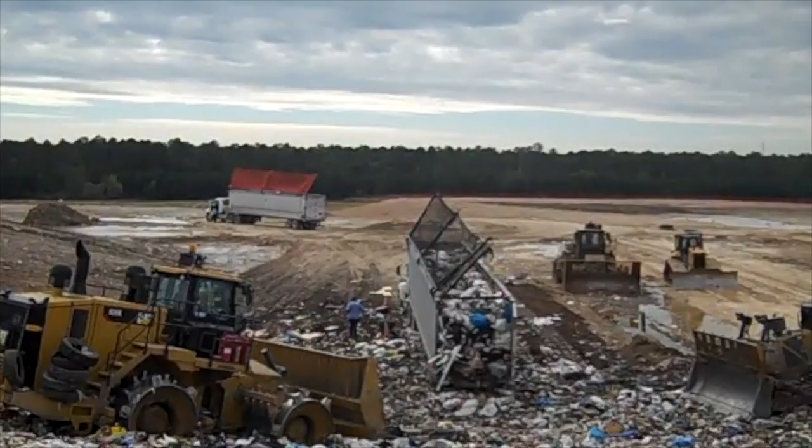A landfill is a place to dispose of waste material by burying it and covering it over with soil, especially as a method of filling in or extending usable land. Landfills typically consist of food waste, plastics, consumer goods, and packaging.

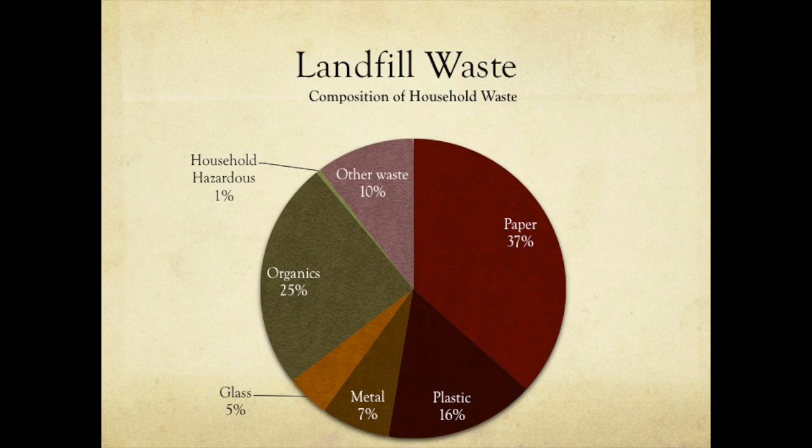Even though these items should be disposed of elsewhere, it is inevitable that electronics, appliances, yard waste, and even hazardous waste enter these municipal waste streams. These wastes emit pollutants, which require air pollution control.

Landfills are classified according to amount and types of waste received. Today, Florida has approximately 95 active Class 1, 2, and 3 landfills. Class 1 landfills receive an average of 20 tons or more of solid waste per day, and Class 2 landfills receive an average of less than 20 tons of solid waste per day. Class 1 and 2 landfills receive general, non-hazardous household, commercial, industrial, and agricultural waste.

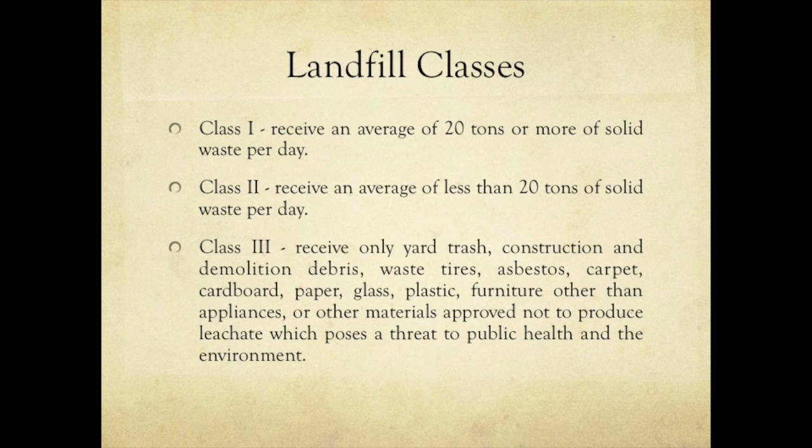Class 3 landfills are those which receive only yard trash, construction and demolition debris, waste tires, asbestos, carpet, cardboard, paper, glass, plastic, furniture other than appliances, or other materials approved not to produce leachate which poses a threat to public health and the environment. The municipal waste industry contributes to global contributions of greenhouse gases, as well as air pollutants that can cause direct harm to human health.

A primary concern that must be addressed in the design and operation of modern sanitary landfills is the potential explosive nature of gases that are produced by decomposing solid waste during the landfill's life. Landfill gas is a product of solid waste decomposition by anaerobic digestion, composed primarily of methane and carbon dioxide, both of which are greenhouse gases.

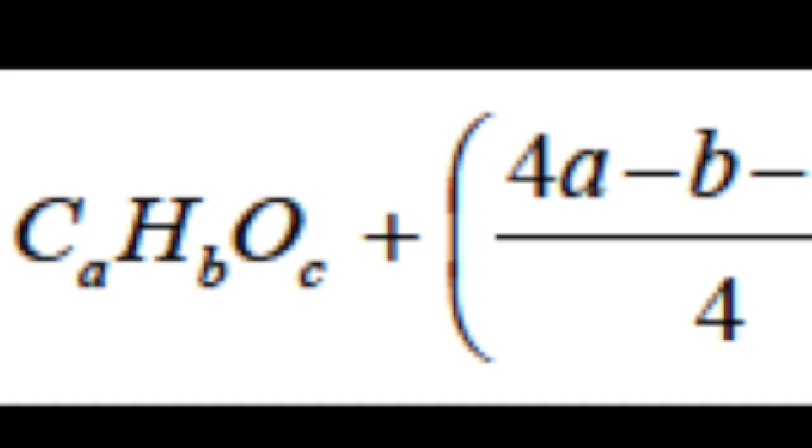It also contains oxygen, water vapor, and minute concentrations of trace gases such as nitrous oxide, hydrogen sulfide, carbon monoxide, VOCs, and non-methane organic compounds. The chemical formula for the anaerobic biological conversion of organic solid waste to methane and carbon dioxide may be described as the decomposition of cellulose, resulting in a final composition of 50% methane and 50% carbon dioxide by volume.

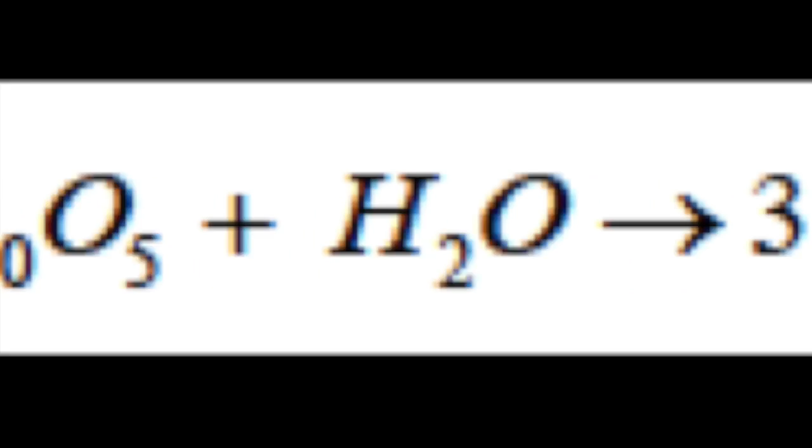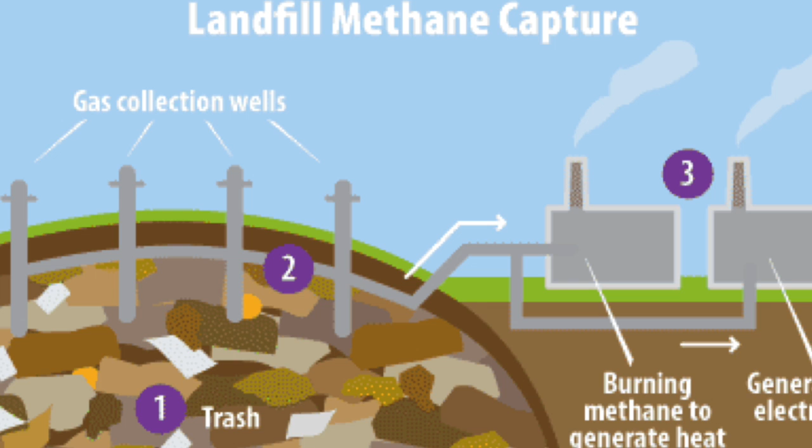Methane is not harmful to human health, but when mixed with the appropriate amount of oxygen, it is flammable and can potentially be explosive, a characteristic many landfills take advantage of by converting landfill gas to energy.

Human lungs transform oxygen into carbon dioxide, which is exhaled and uptaken by plants. Hydrogen sulfide at high concentrations may produce multiple health effects such as irritation to the eyes, throat, and lungs.

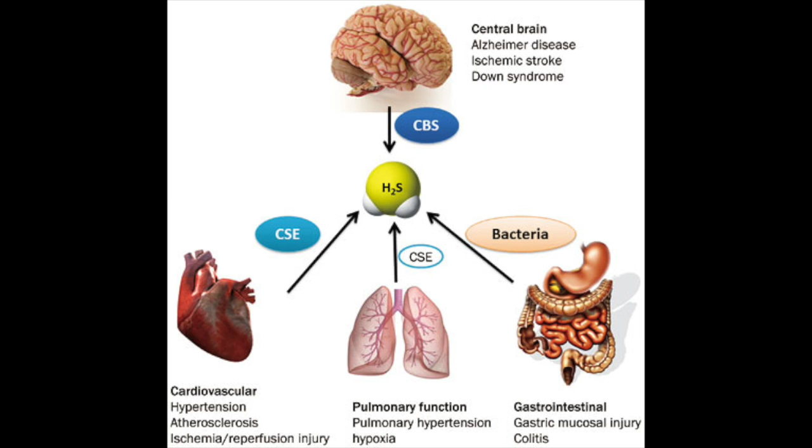Collecting landfill gas can improve air quality by reducing odors and emissions of pollutants such as non-methane organic carbons that can contribute to smog formation.

Our task was to assess the major air pollution problems generated from landfill gas, focusing on the means to mitigate their contributions toward global greenhouse gases, effects to human health, effects of non-renewable resources and energy costs, associated regulation, and landfill air pollution control methods of the best available and most effective technologies.

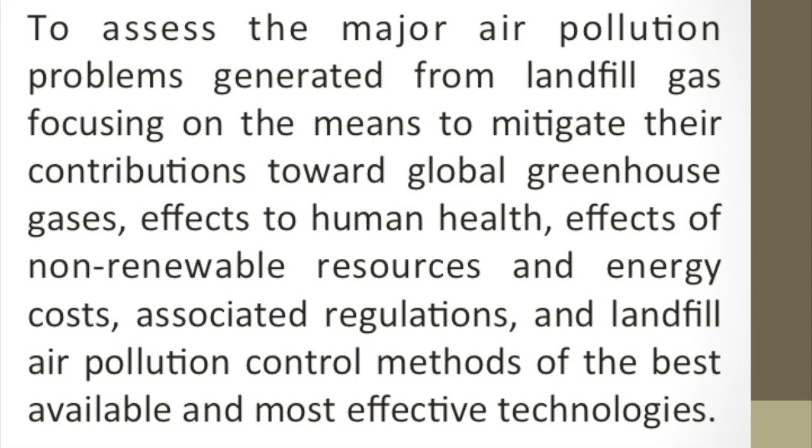Landfills and landfill gas energy projects can be subject to air quality, solid waste, and water quality regulations and permitting requirements. State and local governments typically develop their own regulations for carrying out the federal mandates. Therefore, specific requirements for construction and operating permits differ among states. It's important for project developers to review applicable requirements and regulations.

The Clean Air Act, CAA, regulates emissions of pollutants to protect the environment and public health. The CAA contains 5 provisions that may affect landfill gas energy projects: 1. New source performance standards and emission guidelines. 2. National emission standards for hazardous air pollutants, NESHAP.

3. New source review permitting. 4. Title 5 permitting. And 5. Information Collection Authority, which was used to implement the Greenhouse Gas Reporting Program.

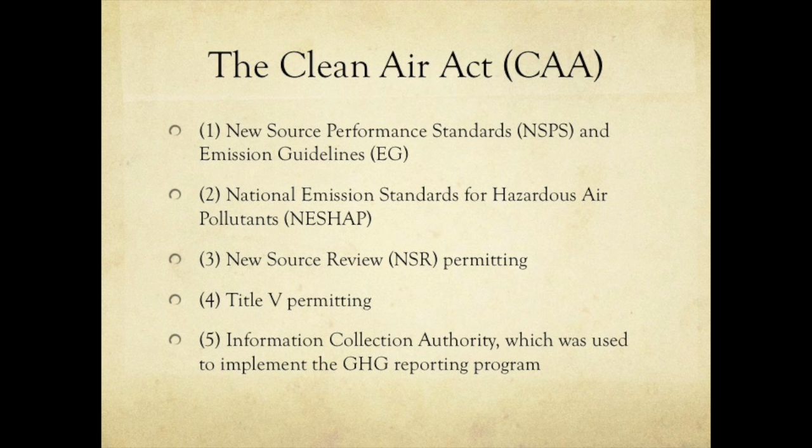Landfill gas energy projects can be part of a compliance strategy to meet EPA's landfill NSPS. Under this rule, landfills meeting certain design capacity, age, and emissions criteria are required to collect landfill gas and to either flare it or use it for energy.

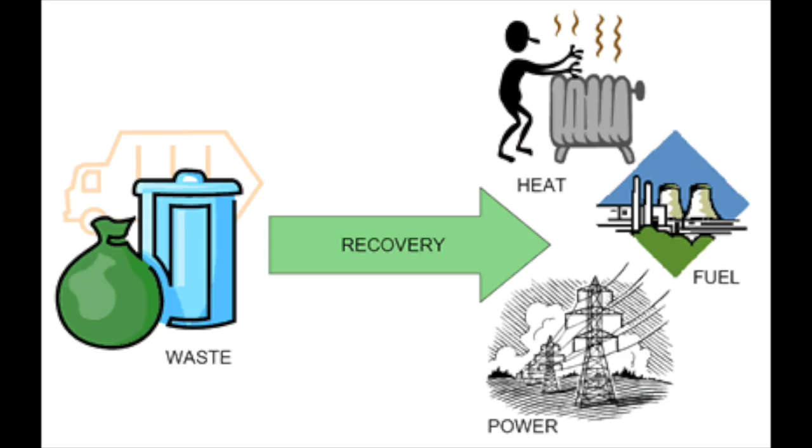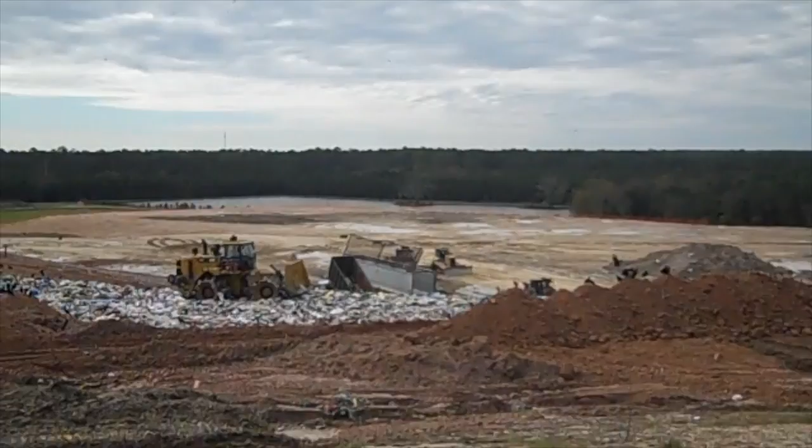The New River facility is a Subtitle D bioreactor landfill with Title V permitting. New River Regional Landfill collects waste from a 6-county region, including Alachua County, resulting in a combined 800 tons of waste per day, peak 1,200 tons per day on special days.

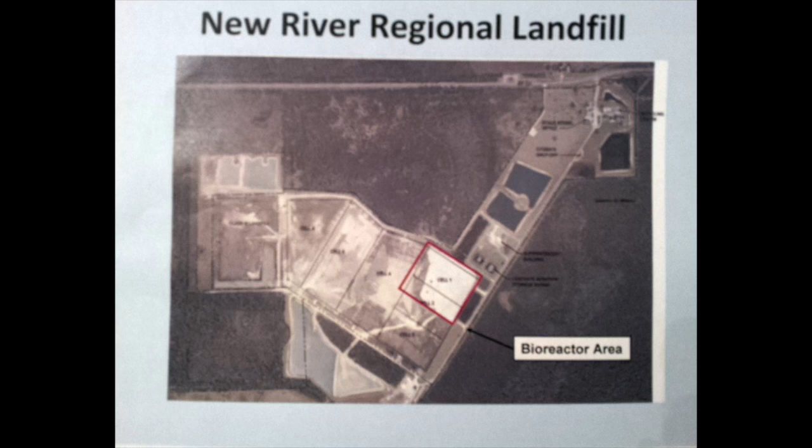Opened July 1st of 1992, the 200-acre facility is divided into 6 cells. Each undergoes an anaerobic digestion cycle to collect the waste emissions.

Over time, these emissions are pumped, collected, and analyzed by on-site instrumentation for relative composition.

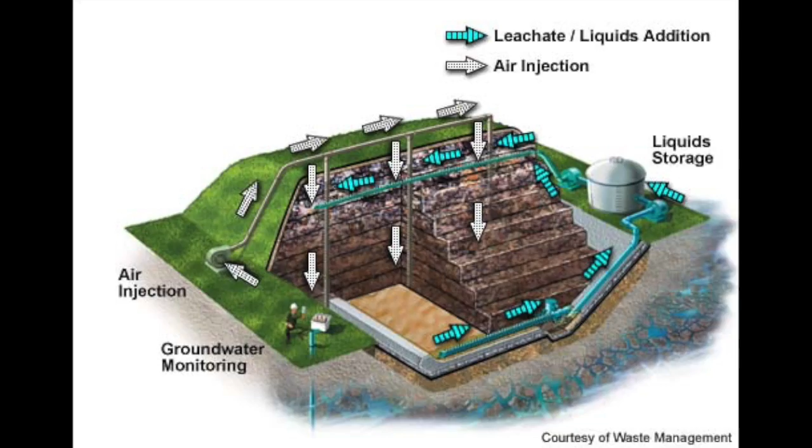A bioreactor landfill operates to rapidly transform and degrade municipal waste. The increase in waste degradation and stabilization is accomplished through the addition of liquid and air to enhance microbial processes. By efficiently designing and operating a landfill, the life of a landfill could be extended by as much as 20 years.

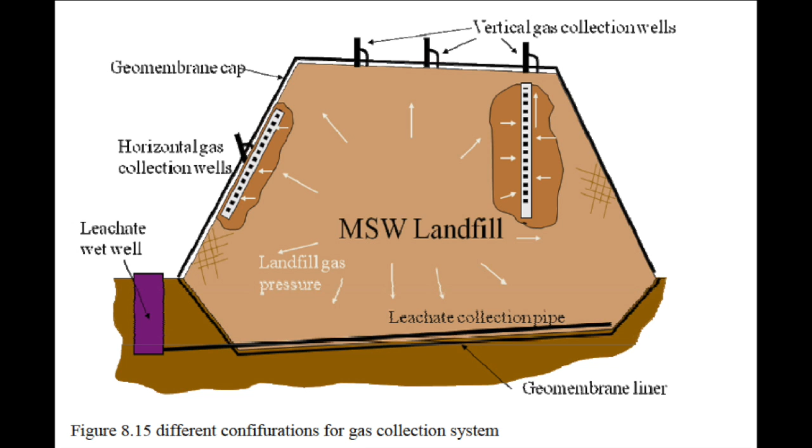Different techniques may be used to collect landfill gas. Possible options include use of horizontal collection systems, vertical wells, or surface trenches under the caps. Let me explain: vertical wells are drilled either in clusters or as individual units.

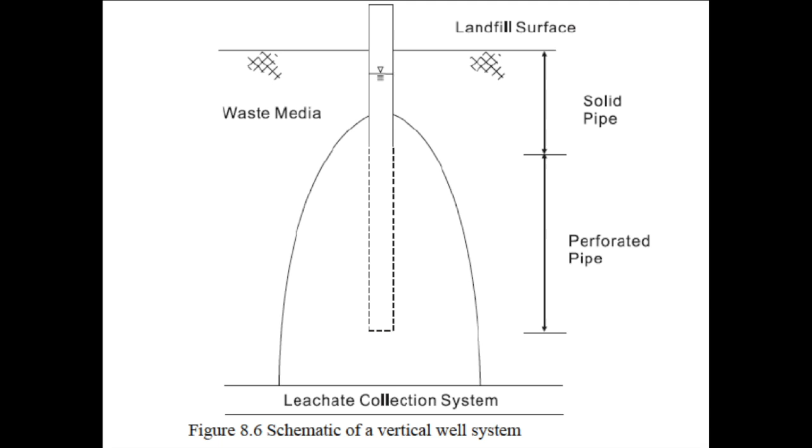Well spacing is variable and is generally recommended based on an evaluation of the radius of well influence. The clustered wells are completed at varying depths to get top to bottom extraction. Horizontal trenches or vertical wells are connected by a manifold to a mechanical blower.

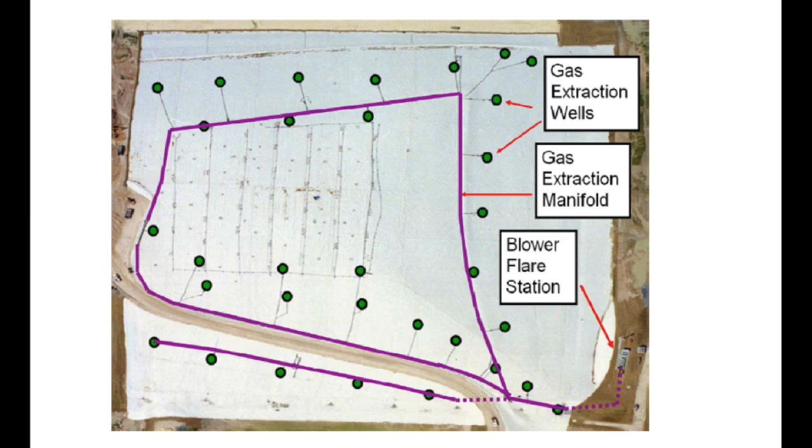The blower induces a vacuum in the manifold and in the wells or trenches, extracting gas from the landfill interior. All the while, the vacuum has to be maintained so as to not draw air into the landfill. So the two blowers that are operating are what is powering the vacuum system across the whole landfill.

So what we have are two blowers, or two vacuum systems, working in tandem, and then you have a backup. You always build a backup when you're balancing your well field, which is what we do on a pretty continuous basis out here.

And so the harder you pull, the more chance you have of pulling in air, so you're introducing oxygen into your landfill, which is something that you don't want to do.

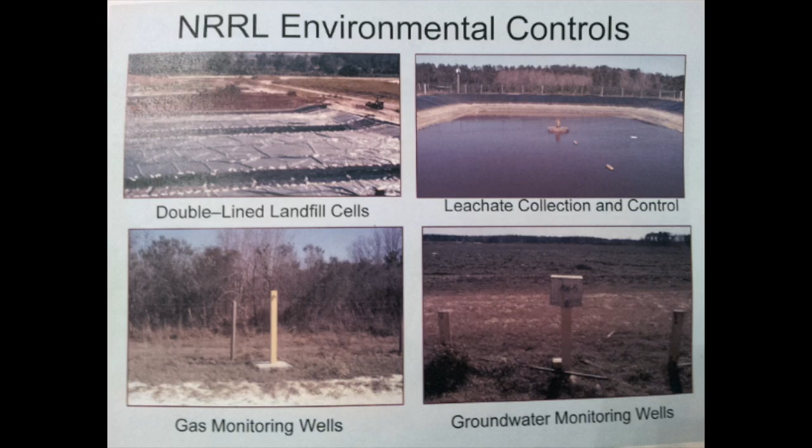Maintenance of the gas collection system is critical to capture quality gas in great quantity. Gas quality is an important measure of a fuel's performance and safety. Trace gas components are an important factor as well due to regulation.

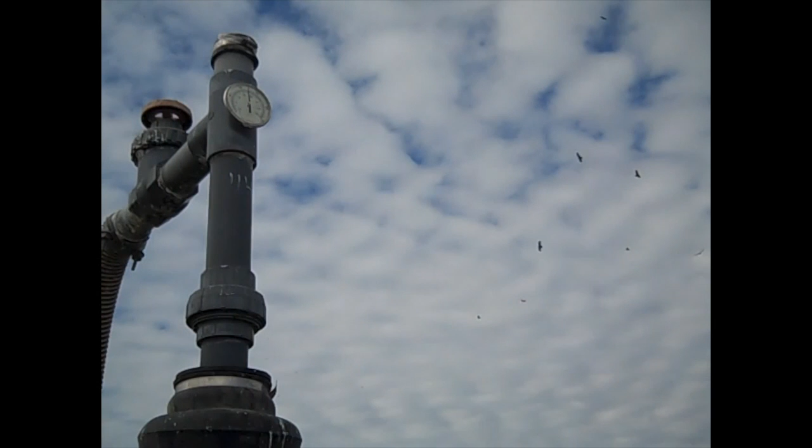For landfill gas emissions, peak concentration for stored waste climaxes at around 5 to 7 years. As a result, most air pollution control methods for Class 1 landfills are more subtle by nature and consequently not as intensive as other air pollution technologies found in other industrial services.

There are many different trace gases present in landfill gas, but they're at such small quantities that we typically don't deal with them on a daily basis. That's something you check on an annual basis, or maybe semi-annual.

Typically, on a daily basis when we're balancing our well fields, we're dealing with methane, carbon dioxide, oxygen, and then a balance, which would be both your water vapor and your nitrogen. So when we look at all these wells, we're looking at methane, carbon dioxide, and oxygen.

Landfills affected by RCRA Subtitle D are required to control gas by establishing a program to periodically check for methane emissions and prevent off-site migration.

We have 27 groundwater monitoring wells and 28 gas monitoring wells to make sure methane isn't moving off-site.

Currently, the gas is burned into the atmosphere by this flare tower. The barely visible flame is indicative of how fuel-lean the emissions are.

The flare has 3 blowers, and we use 2 at any given time. We're able to set the flow rate of the vacuum system either by flow rate or by pressure. Typically, the flare operates at about anywhere from 1500 to 1600 SCFM, standard cubic feet per minute.

So that's what it's pulling out of the landfill at any given moment in time. But we can go up to about 1800. I think I've seen it at the complete maximum around 1850, 1900. But we don't like to operate it like that.

We don't just recklessly pull in and jack up the SCFMs as high as they can go. There's a balance that we find. Typically, at this site, it's about 1600 where we can cruise pretty well.

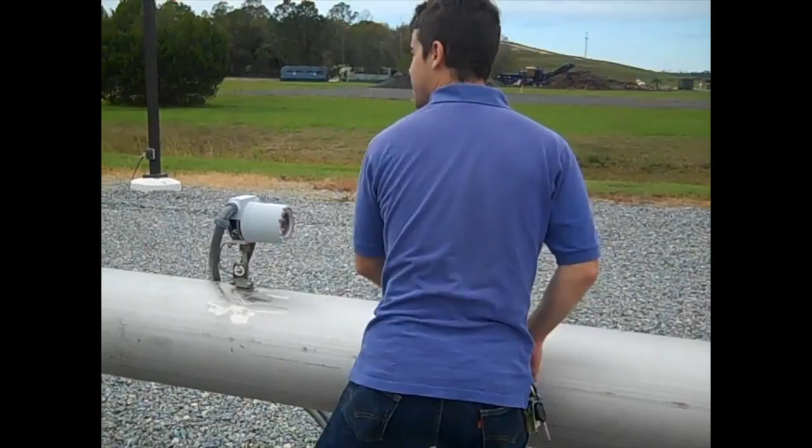So this is telling us right now that we're reading about 1200 SCFM. What's the concentration of oxygen in the air?

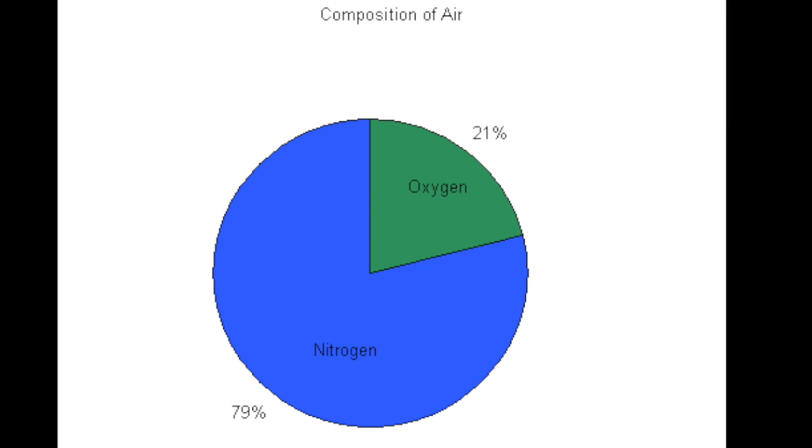21%. Given an ambient air concentration of 79% nitrogen, 21% oxygen, resulting exit gas concentrations for an ideal bioreactor landfill would be 79% nitrogen and 21% carbon dioxide. This assumes all oxygen is utilized for waste degradation.

However, in an actual aerobic bioreactor setting, conditions include both anaerobic and aerobic processes, thus methane formation as well as carbon dioxide formation results. And what you look for is about 50% methane, about 45% CO2, and then less than 1% oxygen, and then some water vapor and probably your nitrogen gases.

As the flow rates change, we go around and rebalance the well field, and that's what the gas extraction monitor is for, the GEM as we call it, to make sure that all the wells look good, because if all the wells are at 50%, then we know our flare is going to be 50%.

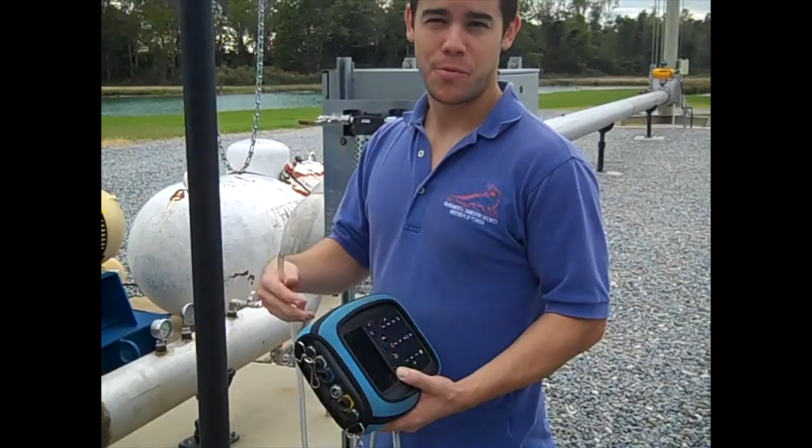This is the gas extraction monitor. We call it a GEM. So what we'll do is take a sample of gas right out of here and check the quality.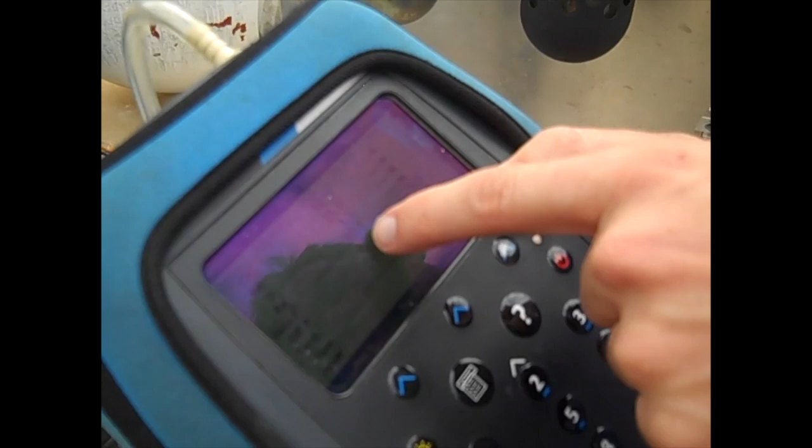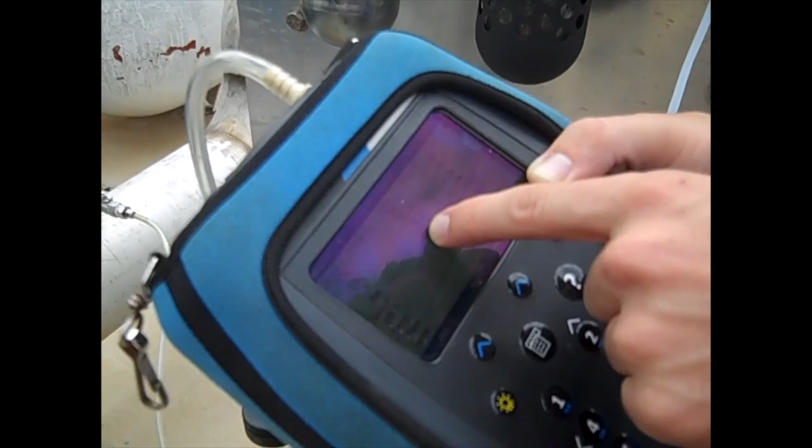So we're seeing a little high on the water vapor in the balance, but we're getting 50% methane, 35% CO2. As long as we're less than 5% oxygen, we're okay. We like to see it below 2%, so it's a little higher than we'd like.

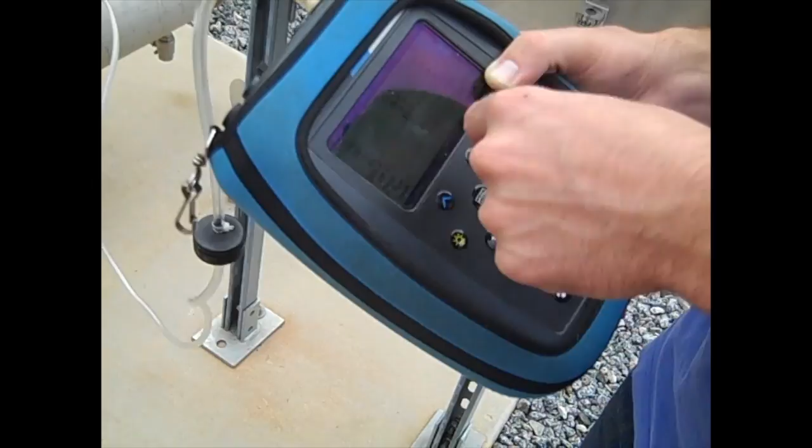We'll let it run for a little bit longer and see if that changes it. But overall, we'd call that pretty good methane, pretty good landfill gas. The gas comes into here.

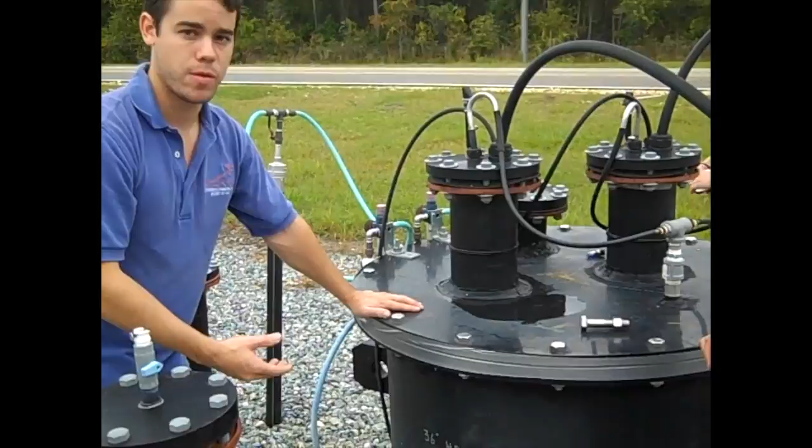That vacuum, or the landfill gas, is wet gas. There's water vapor in it. It flows from the sump into here.

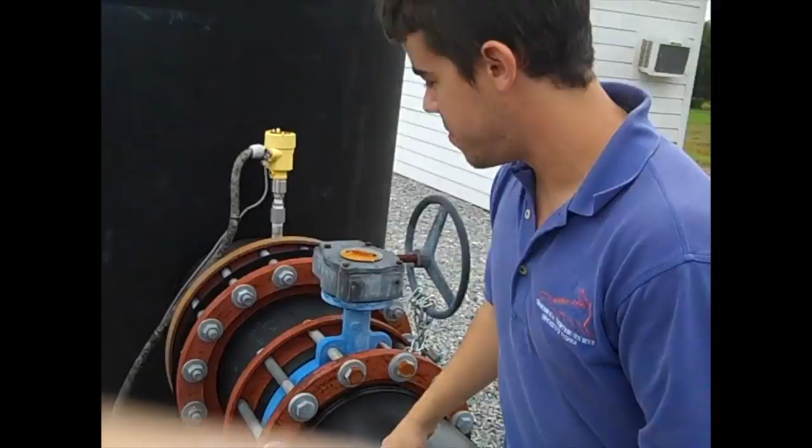This is called a condensate knockout. Now we have baffles in here that create a surface that allows for that water vapor to hit the surface, condense, and become a liquid. Then it drains out back into the bottom of the sump, and we use pneumatic pumps to pump the condensate out, and that goes to treatment with the leachate.

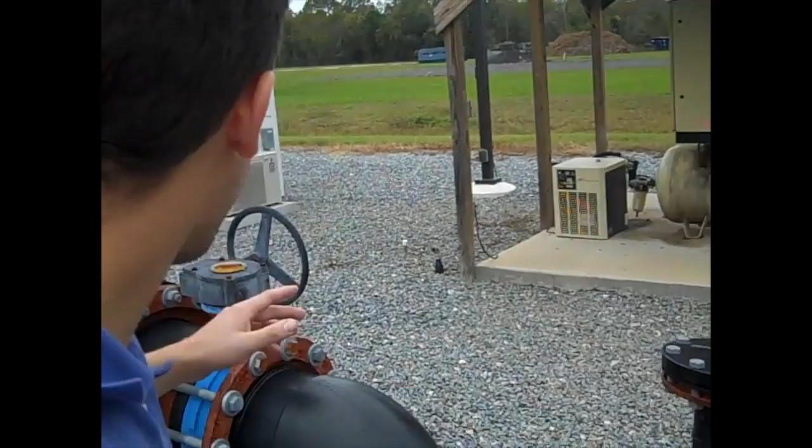So what we have is wet gas on this side, and dry gas on this side, and the dry gas is what gets burned.

All that's going on right here is we're aerating these ponds, and that helps with the denitrification. Nitrates and nitrites, ammonia to N2. The N2 goes off, and then helps reduce the nitrogen that we would otherwise recycle.

Landfills and owners of stationary combustion equipment that burns landfill gas may be required to report greenhouse gas emissions under 40 Code of Federal Regulations, CFR, Part 98.

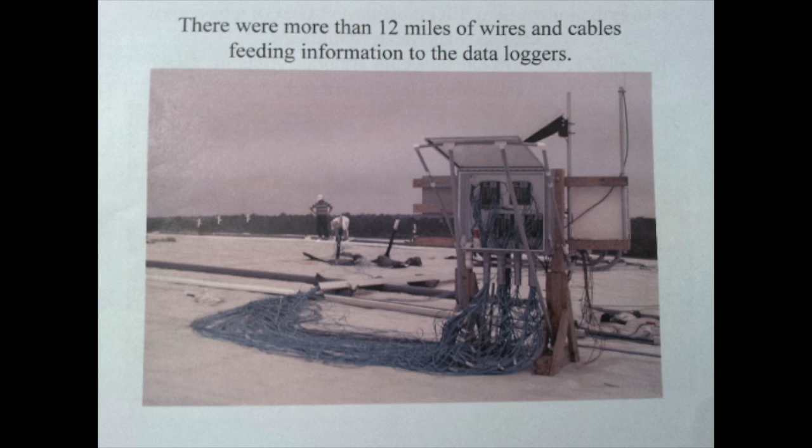So this is all the electrical equipment. We have both a hard copy readout of the gas flow and temperature of the flare, and then the digital version. The engineers at Jones Evans who take care of this site see this in real time at all times, and our guys out here see this in real time at all times. But for EPA, we're required to maintain hard copies, so the hard copy is kept in a safe place.

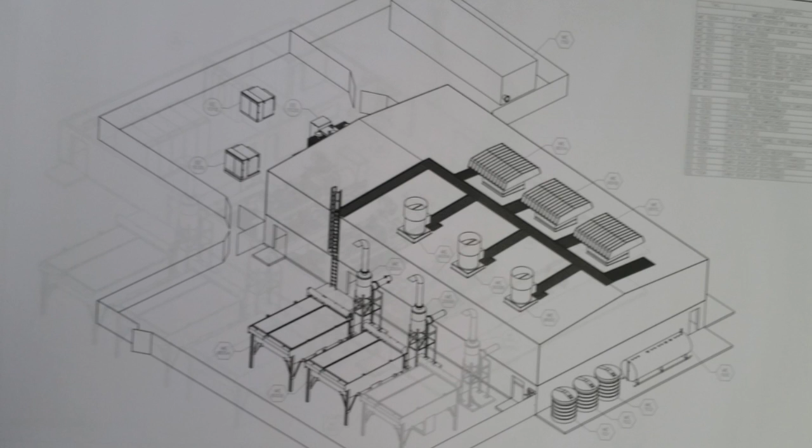The New River Regional Landfill has the monetary capital and designs in place currently to facilitate its own waste-to-energy facility. Here is the design specs for the facility. The new waste-to-energy facility will premiere two generators with space in place for a third when operations expand.

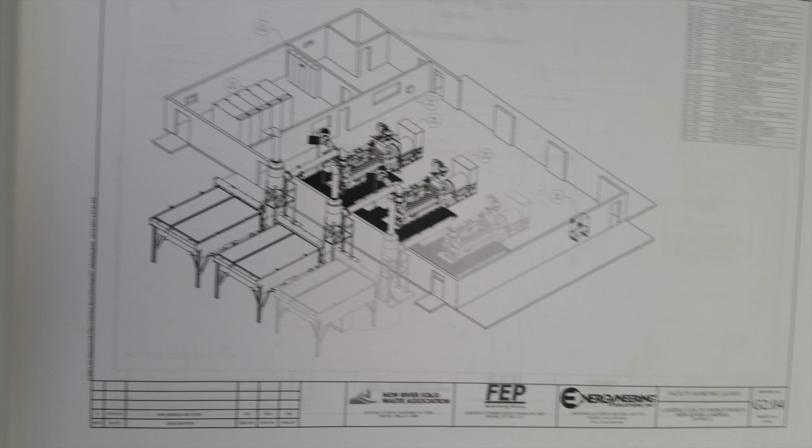New River claims this energy generation will bring the facility great profits. The waste-to-energy facility and flare tower do not have to purify landfill emissions, which already contain 50% methane. Hypothetically, if the facility decided to sell its fuel commercially, the effluent would need to be stripped of water vapor and carbon dioxide to produce a 98% pure methane stream.

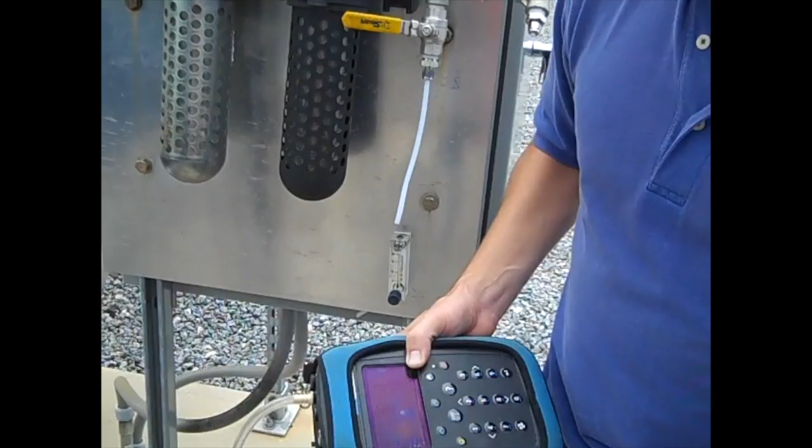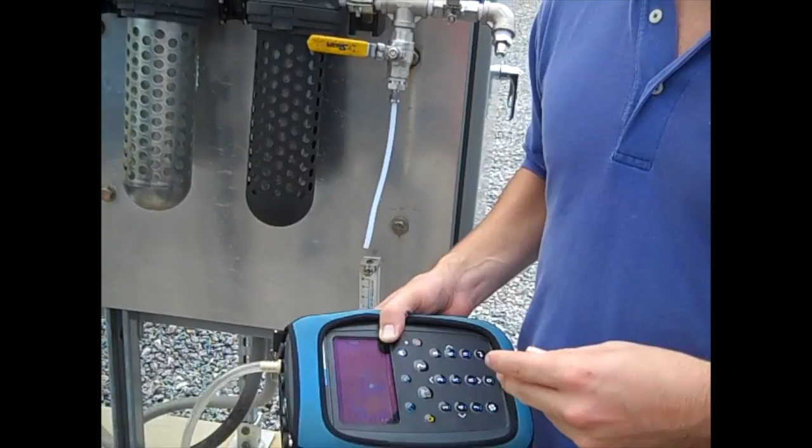It's only 50% methane, so if you're going to put this into a natural gas pipeline, you have to strip all the CO2 and all the water vapor off of it. You have to make it something that's 98% methane. There's hydrogen sulfide in there too, so you remove that. If you're just burning it to create energy on site using a generator, you don't necessarily need to do that—you could just burn it as landfill gas. There are generators that can do that, so it totally depends on your application, what you're doing.

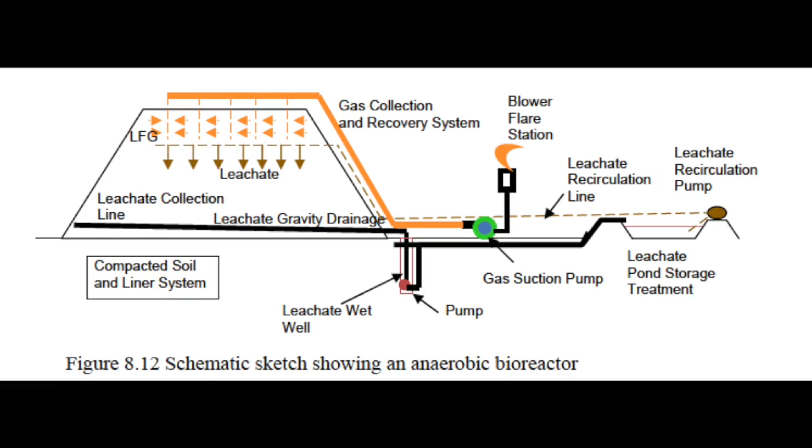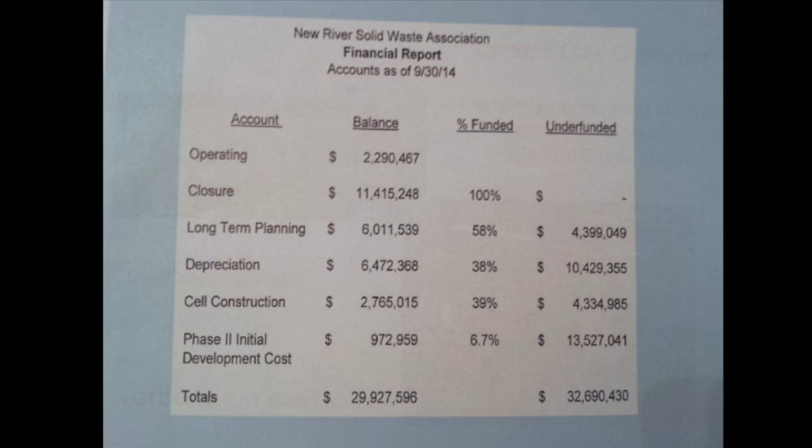Gas recovery and subsequent use play an important role in reducing the total cost of anaerobic bioreactor landfills. The estimated capital required for a 40-acre collection system designed for 600 cubic feet per minute of landfill gas is approximately $1,022,000, or $25,550 per acre, assuming one well is installed per acre. Typical annual operation and maintenance costs for collection systems are estimated to be $180,000, or $4,500 per acre.

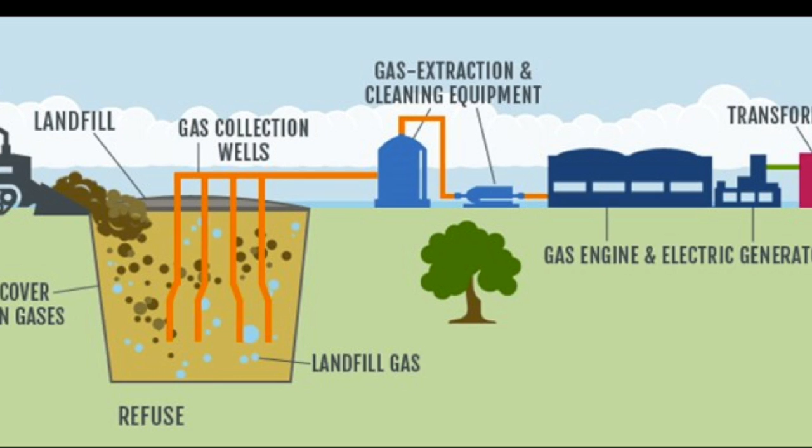If a landfill gas energy project generates electricity, often a landfill will use a portion of the electricity generated to operate the system and sell the rest to the grid to offset these operational costs. Flaring costs have been incorporated into these estimated capital and operating costs of landfill gas collection systems because excess gas may need to be flared at any time, even if an energy generation system is installed.

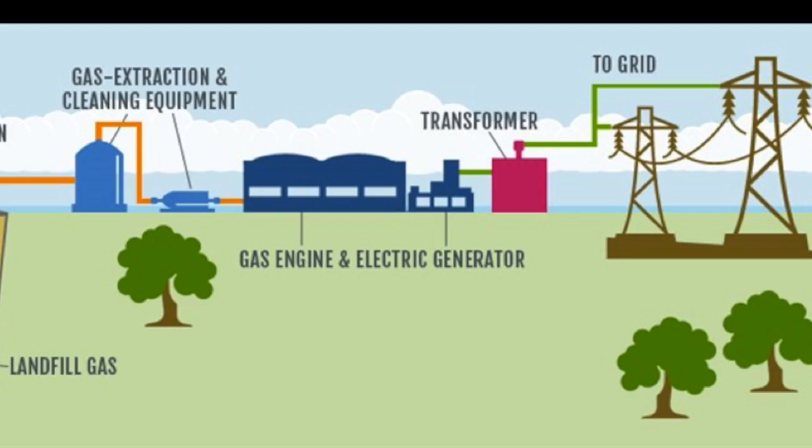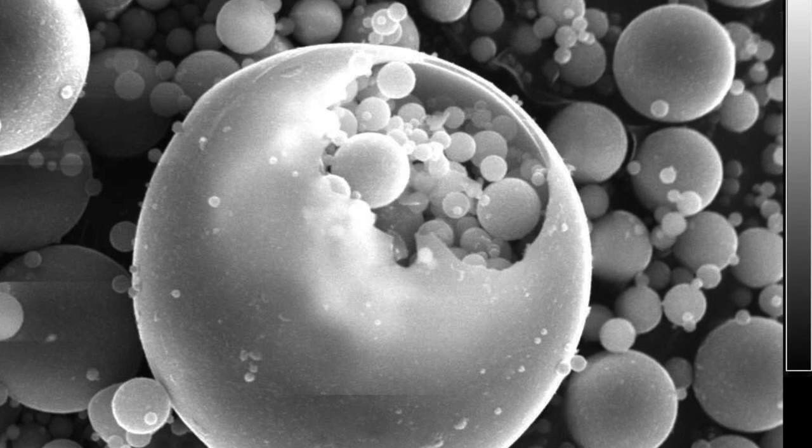Increased gas creation is the motive for collection of the landfill emissions as a fuel source, since it's carbon-rich. Injecting lime slurry, as well as fly ash, acts as a pollution measure to control methane formation and inhibit gas formation outright through methanogenesis.

There are technologies that exist for observing and recording emissions data. Lysimeters are one example, used for measuring the evapotranspiration of waste and consequently its moisture content.

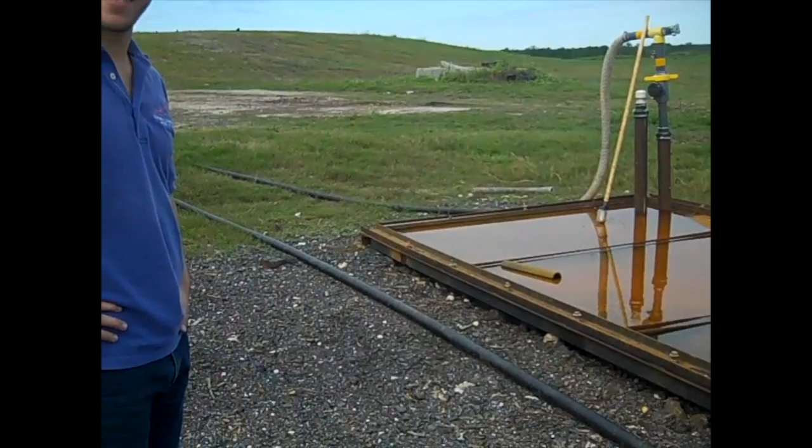No, see over there by the cones? Yeah, there's a couple fires. Okay.

Ensure that your gas collection system and your flare are operating effectively.

That's right, we got trash up in here. Don't be talking trash, don't be talking trash. I only heard that one thirty million times. Oh dang, that was original. I liked it.

You're a star, June, you're gonna be a star. This all used to be trash that we're standing on. Still is. Oh yeah, so these shoes are gonna smell forever. Is that what you're trying to tell me? Not to clean them.

Oh my god, oh, there's a lot of sludge.